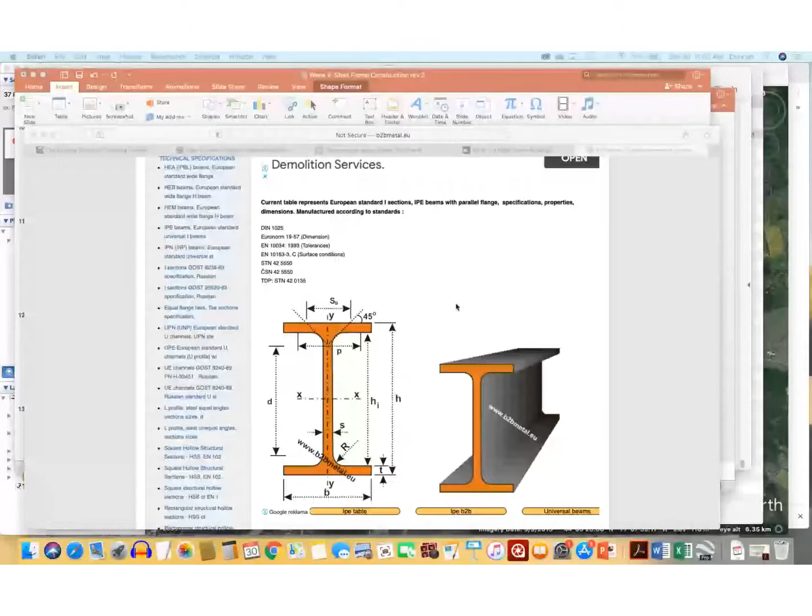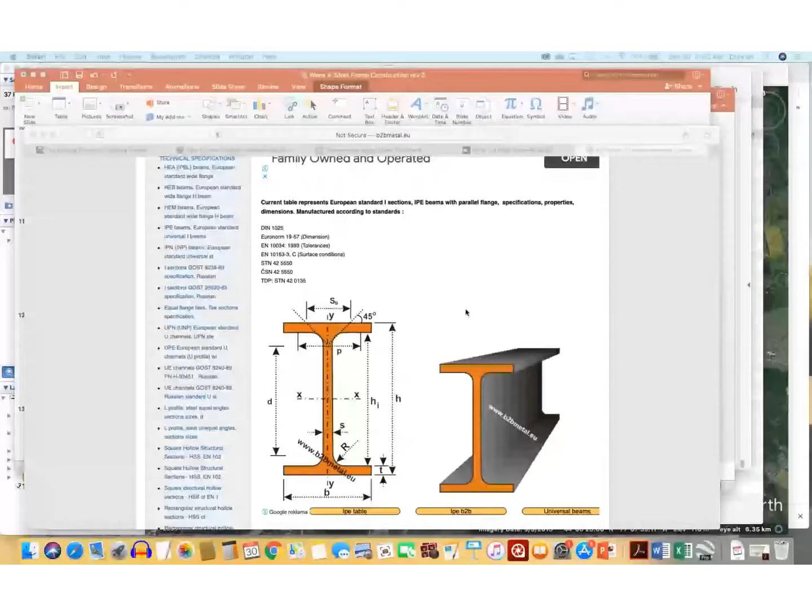There's a link here that will take you to, let me go over here to my slides. For some reason, it seems as though the links don't work in the, so if I flip over to my... I'm getting the spinning wheel. Can you see an orange cross-sectional shape on your screen? Yeah. Okay. All right.

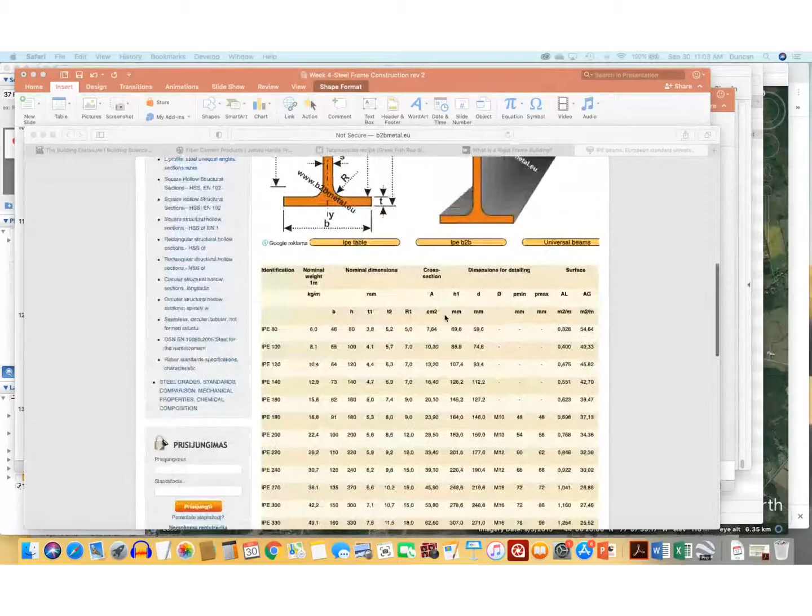So that's the link, and these are the European standards, which of course are metric, and we're kind of a hybrid situation here in North America because of the American market. We typically work with imperial sizes, but they may be expressed in metric dimensions. So you're probably familiar with that situation in other materials as well.

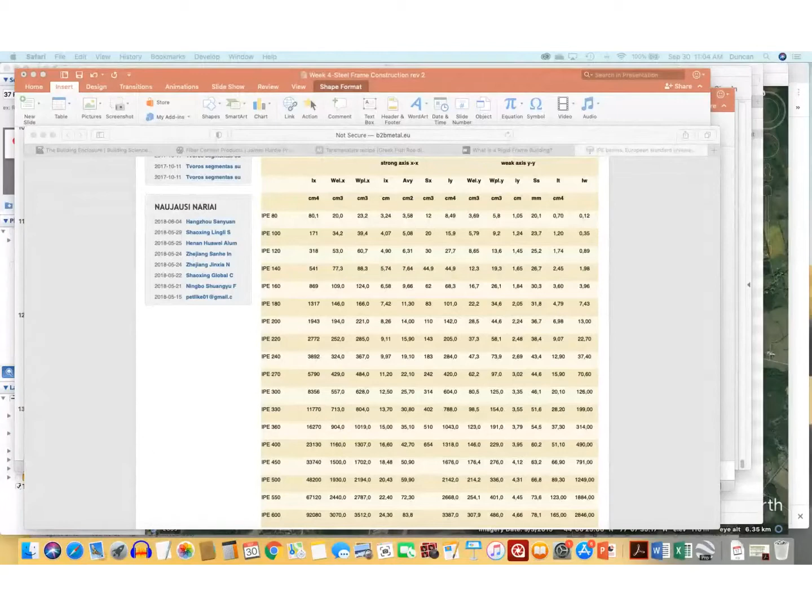So coming back to our framing drawing. So the engineers, when they're designing the floor structure, are taking into account live load, dead load, designing it for shear, designing it for bending, and they arrive at a shape that satisfies those needs. And so they put them on their drawings, and then they send them over to us, the architects. And so we need to understand what it is they're telling us.

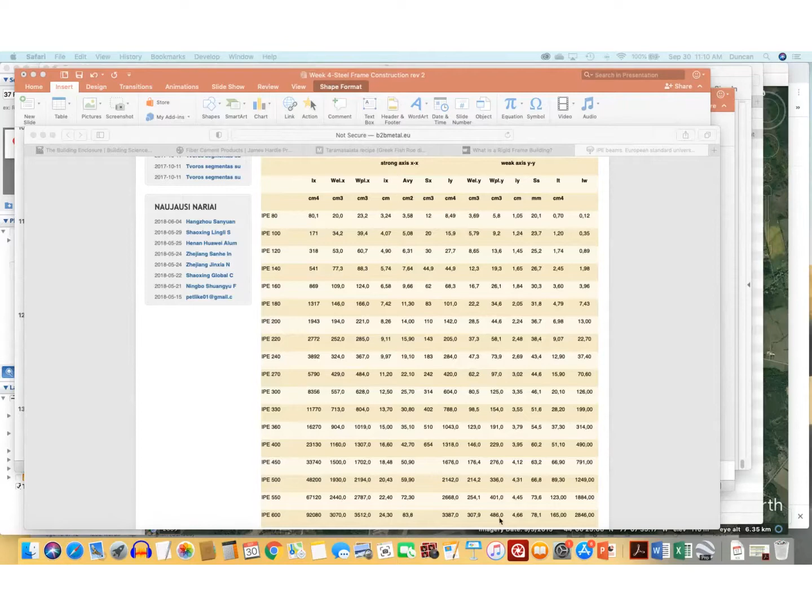So you can just see in this, hang on, let me use my PowerPoint. You can see this okay? Yeah, we can. Yeah.

Okay, so if we zoom in on this wide flange beam over here, we can see that by adding additional thickness, they are varying the dimension a little bit, but in fact, what they normally do is add the extra thickness to the inside so that the overall size of the beam, top to bottom, doesn't change. But the weight of the beam gets heavier because they've added more material on the flange here and more material on the flange there, which makes it heavier and stronger, right? It's able to carry more load.

So the engineers will use a consistent depth and vary the weight of the member per foot to get the strength that they need. Yeah. So to the untrained eye, and again, this is why they need to put tags on the pieces of steel when they come to the site, a W18 by 40 looks much the same as a W18 by 30, right? And so we need tags. Okay.

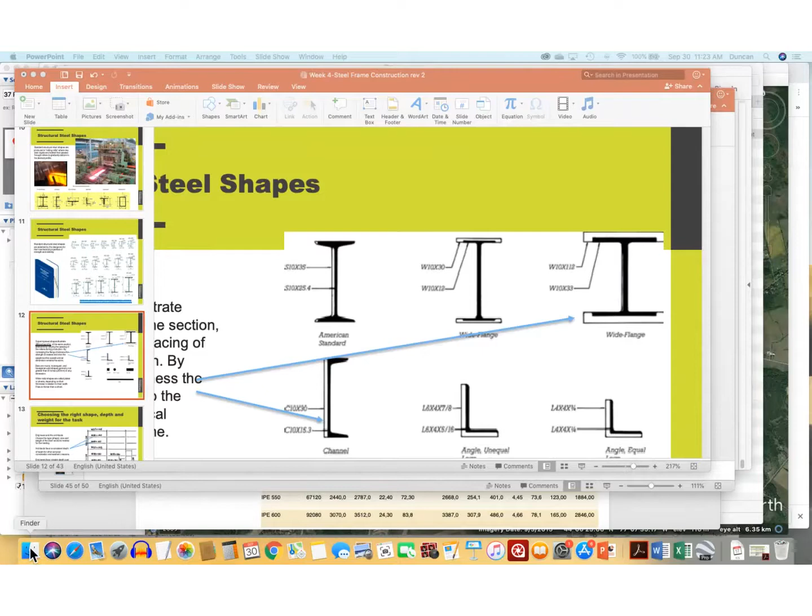Just a second, I need to upload something. Let's take a quick break for say 5 minutes. I'll stop recording. You can go to the bathroom or whatever. I'm going to get myself a coffee, and we'll start again in 5 minutes, okay? So let's say 11:30, okay? Okay, you can hear me?

Yep. Okay, so this is just a photo I found online showing the reinforcing steel that goes into the connection between a column reinforcing steel into the footing, right? So there's obviously a cage of steel, and it transfers that load eventually down to the bottom, and this is going to be filled with concrete to form the footing.

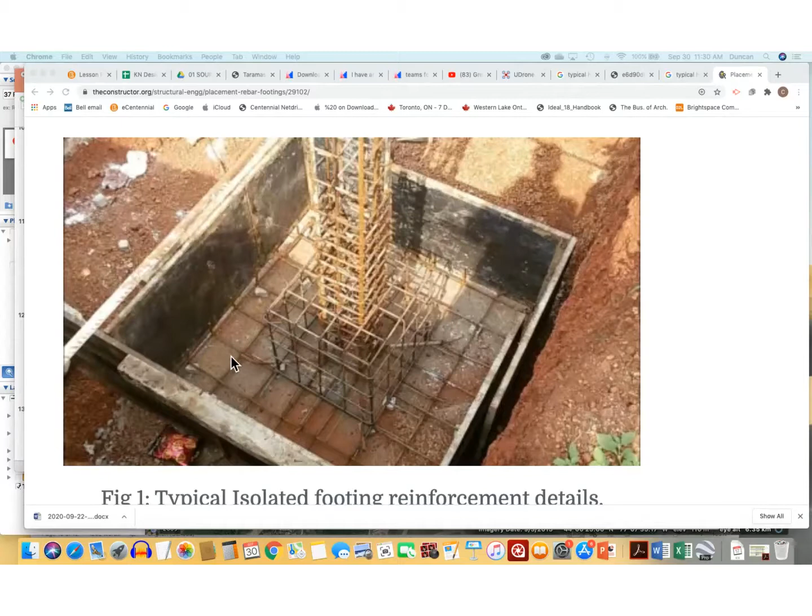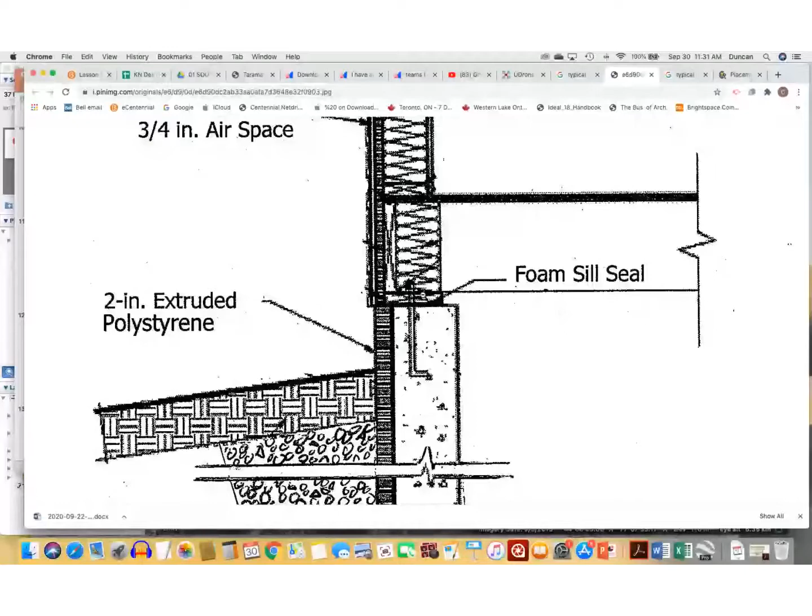So if we think about the logic of what we did in house construction, it's the same thing, right? In this case, we've got a piece of steel cast into concrete. There's reinforcing steel in the concrete. This piece attaches to the bottom plate of the framing system, and therefore transmits tension into the foundation wall, I should say, through its own weight, and also because of the weight of soil that is sitting on the footing, right?

So all of the uplift that is trying to tip the house over, trying to pull it upwards, is also resisted by the weight of all this soil out here, which is having a pressure on the footing. Yeah? That all makes sense? So the reinforcing steel that we just spoke about in the footing here is doing the same basic principle. Okay. And that's where we were.

So we were talking about how with very big buildings, we've obviously got huge vertical forces to deal with, both up and down. Okay. Any questions? Okay. And so here is a good sized column coming into place.

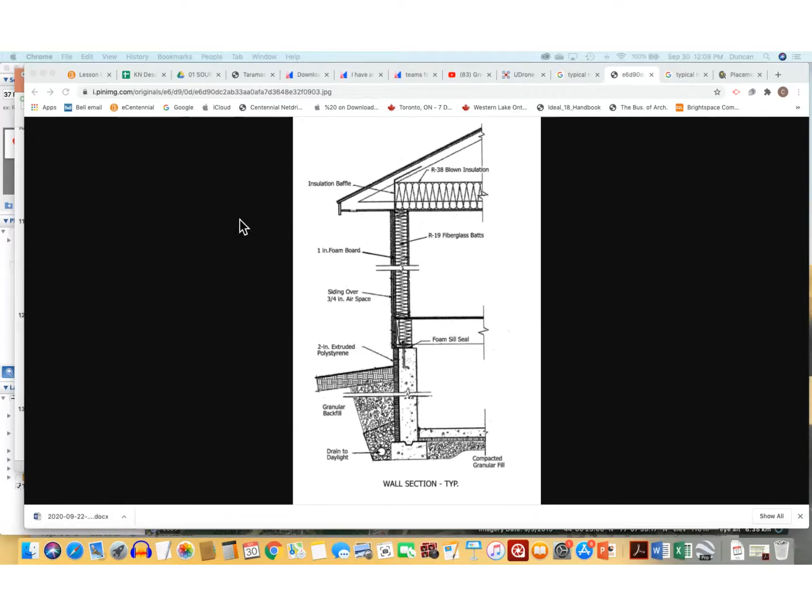which was created for that purpose. So let me have a look in those now. I said earlier, I haven't had a chance yet to go through them to review what you're proposing. So I see 22 of 26 groups have submitted. So whoever has not submitted, get yours in, they were due today. So I will go through those later today and give you feedback on those.

I'm not sharing my screen, but I can. So this is the assignment folders for this course. And as I said, I'm seeing 22 of 26 groups have submitted. Okay. And only one member of the group has to submit, but make sure everybody's names are on it. Yeah. Hello.

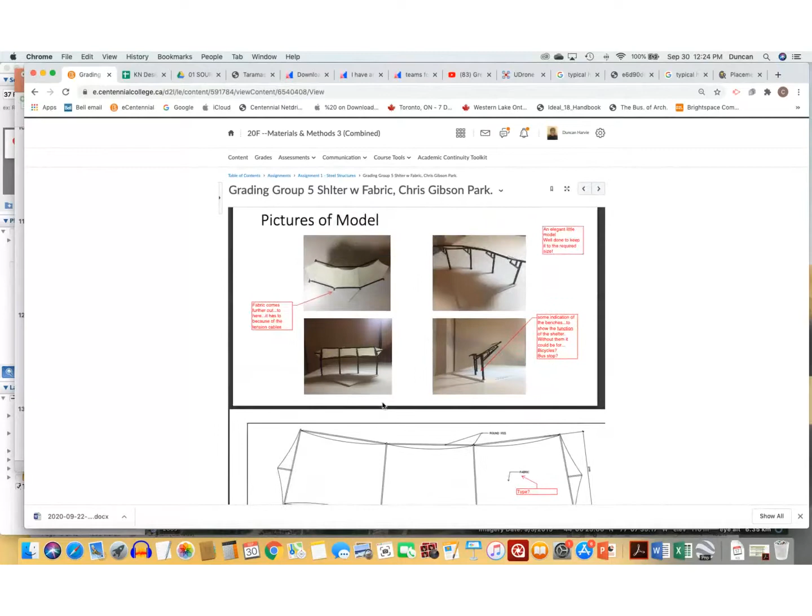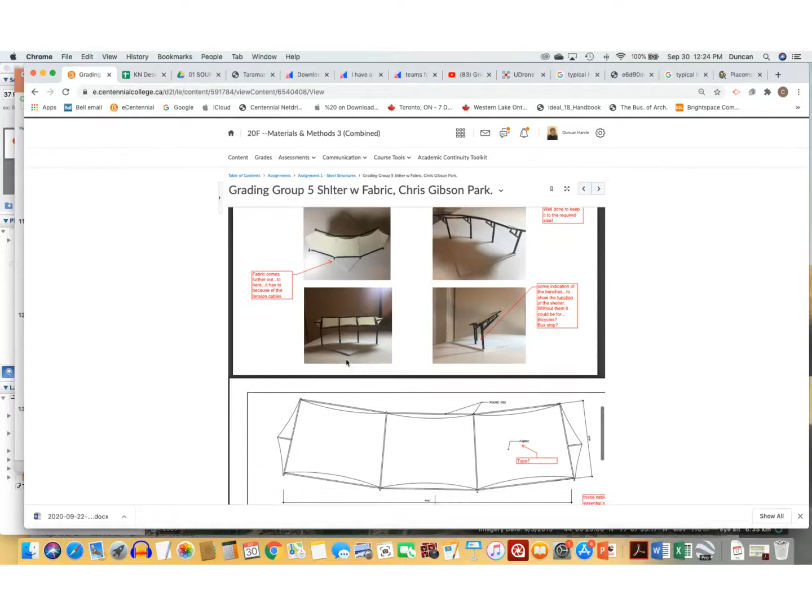And the model is supposed to sit on a base that's no bigger than 6 or 8 inches square, 150 to 200 millimeters. Okay, so they did a delightful, very little model here of the whole thing. If you're doing a larger structure, what I sometimes recommend is that you simply do one bay of the structure rather than trying to build the entire thing.

If we look at this group here, their model is, they just did a model of one of the trees like that. You see? So people have used different materials. They've used metal, wood, plastic, whatever they find most useful or most representative.

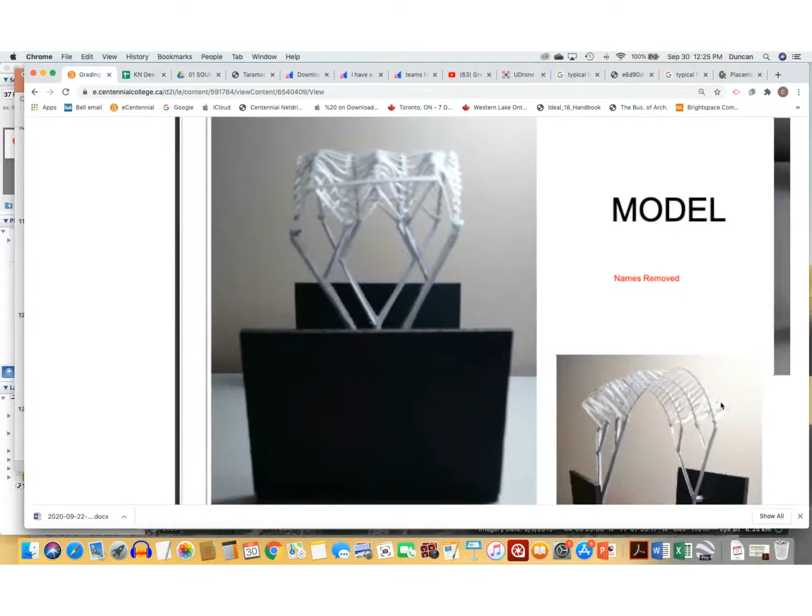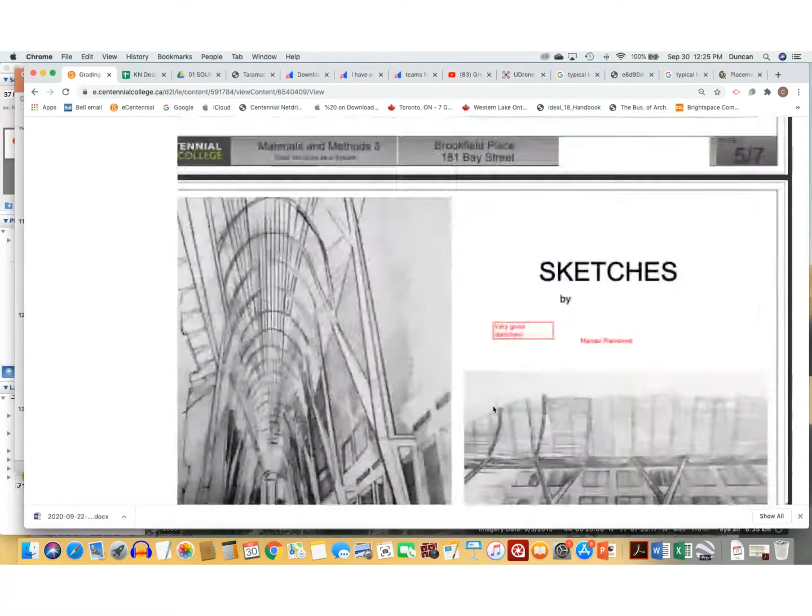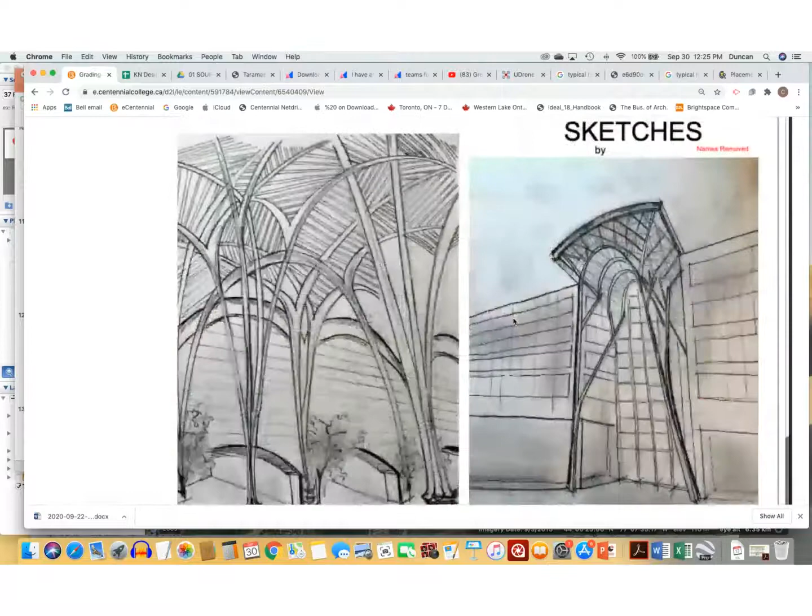I mean, the idea is to try and convey the essence of the structure that you're studying, right? And in their case, the essence of it was the lightness, the delicacy of this structure in place. So I thought that their model was able to do that quite nicely. It was light and kind of airy. And these pieces here are just single thicknesses of paper.

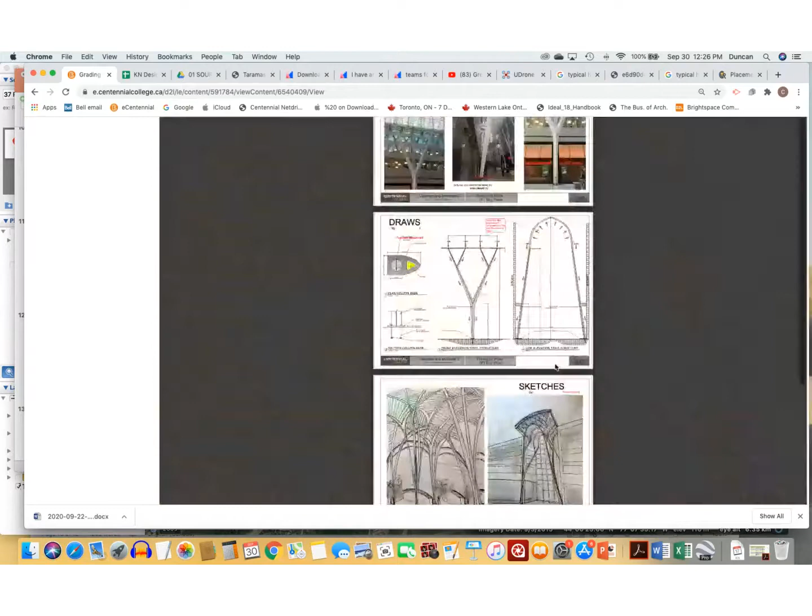Does that answer your question? Yeah, thank you so much. Okay.

Okay, so can we get back to the problem of communication with groups? I guess the first question then is, if somebody has dropped the course. So for that, I need to get the most current class lists. Yeah, that's right. The session will end shortly.

Yeah, so if you submitted your proposal and there's somebody in the group that's not been communicating, then please, you can take your submission back and just highlight anybody who's missing in action. If it's the majority of your group that is missing, or that you haven't been able to get in touch with, I think you better send me an email about that situation.

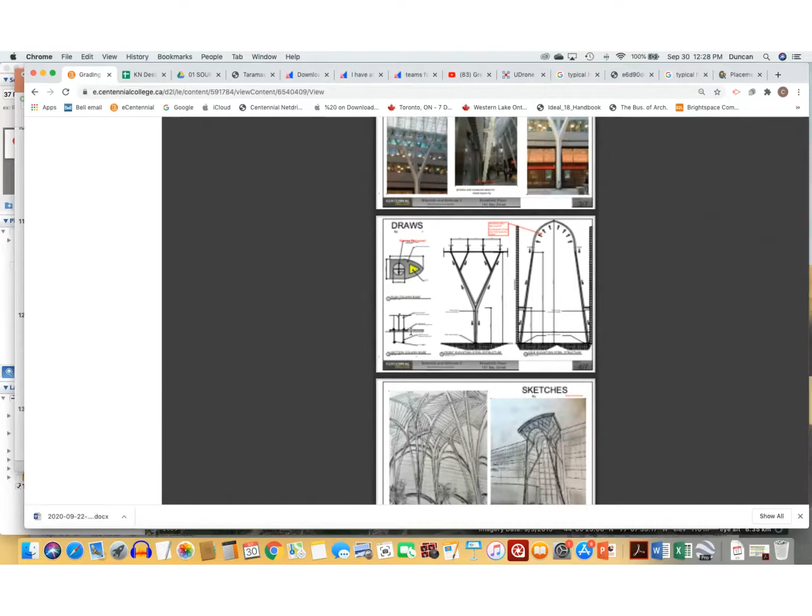So coming to Kush Buben, am I pronouncing your name at all correctly? So the scale is not a function. You do not have to produce it at any particular scale. What you have to do is figure out how much of it you want to model in order to have it sit securely on an 8-inch or 6-inch base. It has to be to scale for sure. You may need to adjust the scale to however much of whatever portion you're building.

So the one that we looked at earlier, obviously they worked at a very different scale than these people. Yeah. Yeah, the base is 6 to 8 inches square. If 6 is the target, I'll let you stretch it to 8 if you really have to, but try and keep it 6. That's the way it's described in the assignment description, right?

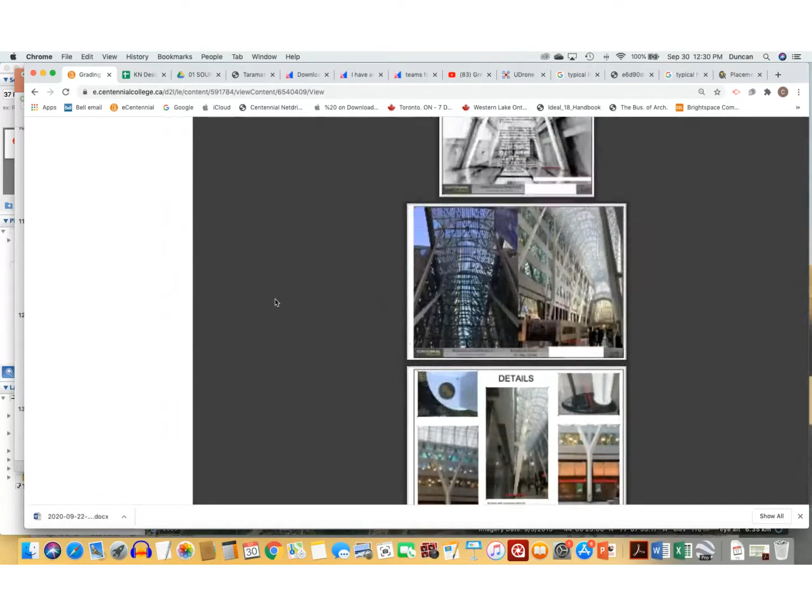Is 3D printing allowed? That's a good question. I would allow it if there's a particular reason for it. I mean, the assignment that I showed you a second ago of that little structure with the fabric roof, they made it out of little pieces of metal tube, and it was delightful. Just a very sweet little model, and I still keep it in my office at the college.

So there's really no reason to work with a 3D printer. Part of the purpose of this assignment is to understand how materials go together, right? And so if you throw your hands in the air and say, okay, printer, you do it, you're not really learning about the nature of how sticks of steel, or sticks plus plates plus bolts, all really go together. Yeah. Okay.

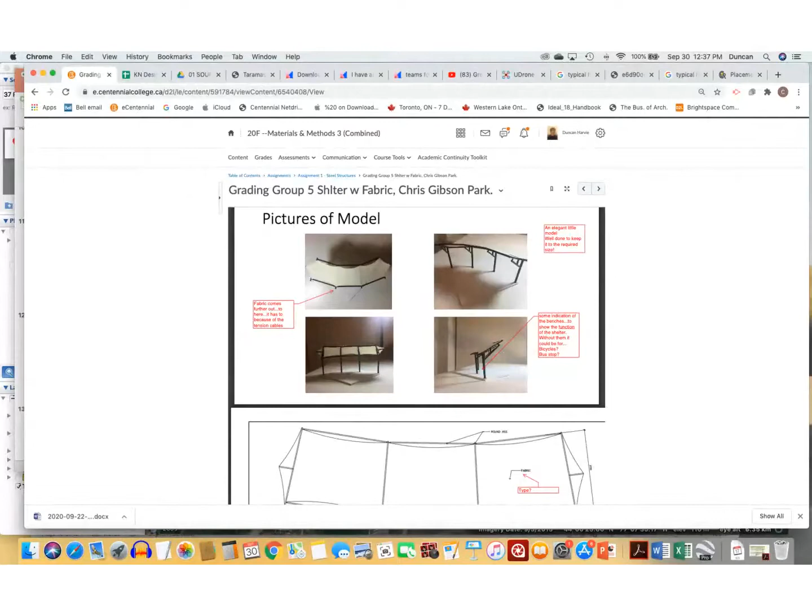So it's an exercise in group and team dynamics, and you've got things like MS Teams to work with, and MS Teams has a sketchboard feature, doesn't it, or a whiteboard to use for notes and ideas? Is that fair to say? Or Zoom? I don't know MS Teams, but there are ways to communicate. You can even do little hand sketches, right? So I can do something like this, and then put my camera back on, and where's my camera? Do that, right? So there are many ways to communicate.

Yeah. Yeah. Is your camera on? No. I just turned it off again, but yeah. No,

I just held up a silly little note as a demonstration that there are many ways to do it. Well, certainly in this program we have a whiteboard, I'm pretty sure. You have it in other programs as well, right? The ability to mark something up, so that you can end up with a result.

Sir, I have a question. We have to wait for the approval of the proposal so we can start working on the structure, right? Yeah. And then you have till the end of October to finish. Okay, thank you. So we're getting a warning sign. We've got 3.5 minutes left in this session. How are we doing?